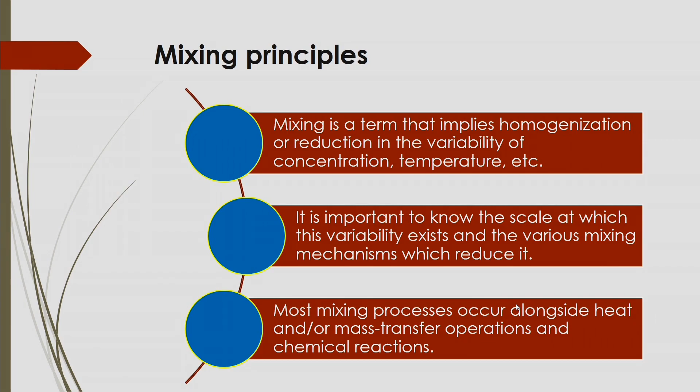So that is why you can say that mixing is one of the important hydrodynamic phenomena in any chemical engineering processes where multi-phase flow systems are taking part. Now, if I say that in any reactor your chemical engineering process is being carried out, in that case you have to use some reactor where the reactions will be carried out.

So, reactor engineering starts with a simple mass balance where your reactions will be carried out. Suppose there is a reaction, so what should be the inlet to the reactor, and is there any generation or consumption of the reactants allowed to pass into the reactor. So the inlet and the generation plus consumption should be balanced by the outlet stream amount and the accumulation, if there is any in the process.

So, here the amount of inlet stream, and generation plus consumption: is any product generated or are any reactants consumed. In that case you have to take into account those terms, and also measure the amount of stream coming out, and also whether there is any accumulation.

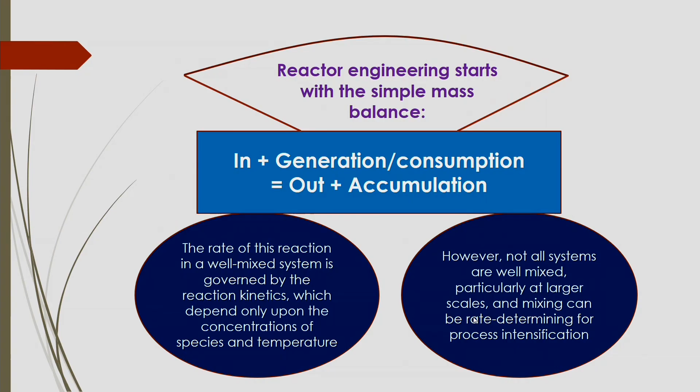If there is three-dimensional mixing, at least in two dimensions you can reduce the back mixing. So you have to design the system in such a way that the mixing phenomena is optimized. And also in fluidization operations, gas-solid reactions are there where adsorption is going on at the solid surface.

So if you design the system in such a way that there will be back mixing of the solid particles, there may be less mass transfer performance from the gaseous stream to the solid stream, because the adsorbent solid particles get back to the original position or circulate, so that due to pressure differences desorption as well as adsorption may happen simultaneously. So there may be hindering of the mass transfer performance.

Another important task for the designer is the prediction of the degree of mixing and the residence time of the species in the vessel. Certain reactions depend on the residence time of the reactants, so you have to design the system such that for a certain degree of mixing, you can predict or estimate the residence time of the reactants.

By generating some models you can predict that degree of mixing and the residence time. There are several methods to estimate the degree of mixing, like the tracer technique method, and some other techniques are also available. The tracer technique is one of the important techniques by which you can predict the degree of mixing.

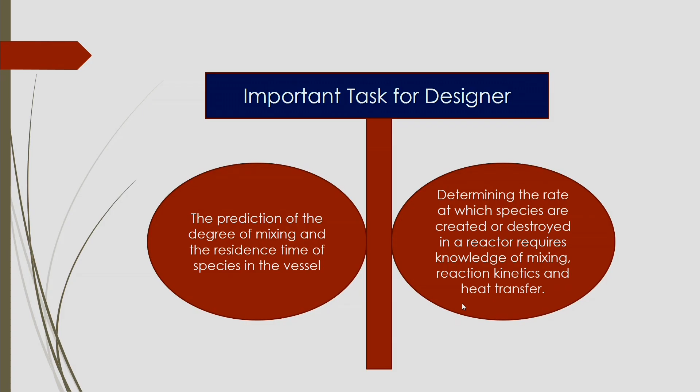If you have more mixing, you will automatically get a different value of activation energy and the rate constant of the reaction. These are the important criteria for the designer to develop systems based on these mixing characteristics for process intensification.

Designers nowadays are procuring different devices based on these mixing characteristics, trying to reduce the size of the reactor. Reduction in scale is one of the important aspects for process intensification.

What happens when the scale is reduced for process intensification? The reduction in scale implied by intensification has many desirable consequences for chemical engineering operations, like lower mass and heat transfer resistance enabled by the reduced path lengths of the diffusion or conduction interfaces.

If you make a system such as a micro channel based reactor, you will see that path lengths may be very small for the diffusion or conduction through the interfaces.

So, in that case you can get lower mass and heat transfer resistances, so the performance of the mass transfer operation and heat transfer operation will be enhanced. Also important is coupling with more intense fluid dynamics in active enhancement equipment, where based on this mixing phenomena you can intensify the equipment.

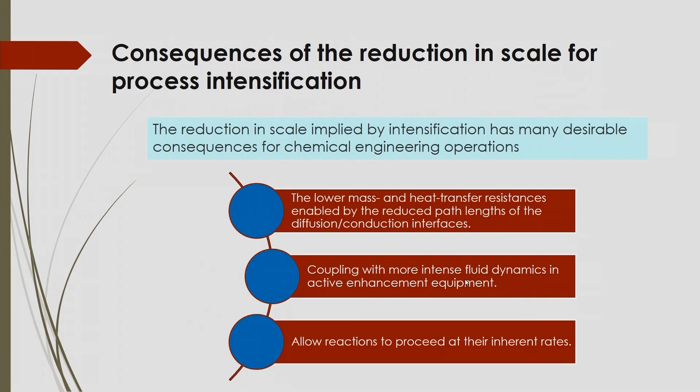Also sometimes you reduce the scale of the system in such a way that when getting contact of the gas-liquid system in, suppose, micro channel systems, gas and liquid flows are there. So you can get more contact, more thin films between the gas and liquid.

You get reactions at the interface, and more reactive mass transfer happening in that chemical engineering process. This can be produced just by the inherent properties to get a more reactive system or mass transfer system by reducing the scale of the unit.

Also, sometimes a more rapid mixing environment can be suggested for process intensification. In that case, producing the rapid mixing environment can be afforded by low reaction volumes, which should enable conservation as well as conversion and selectivity to a maximized process unit.

Also, residence time distribution may be substituted for the hour-scale processing times associated with large conventional batch operations, which will be beneficial, with consequences for energy consumption and process safety.

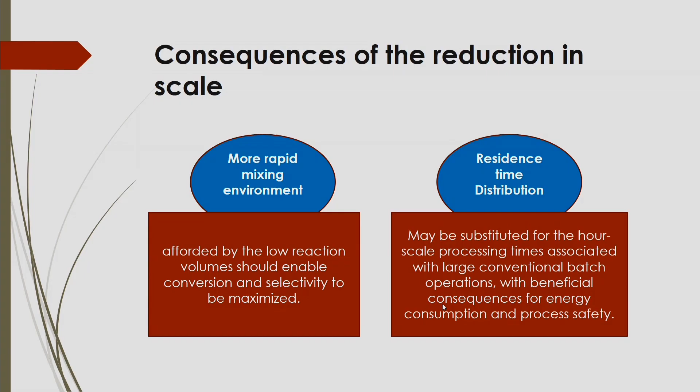Now, the main question is why to learn about this mixing phenomena. Basically, understanding of mixing is desired for the purpose of optimized operation and design of industrial scale reactors. Also, in many cases there are simultaneously competitive several reactions that occur.

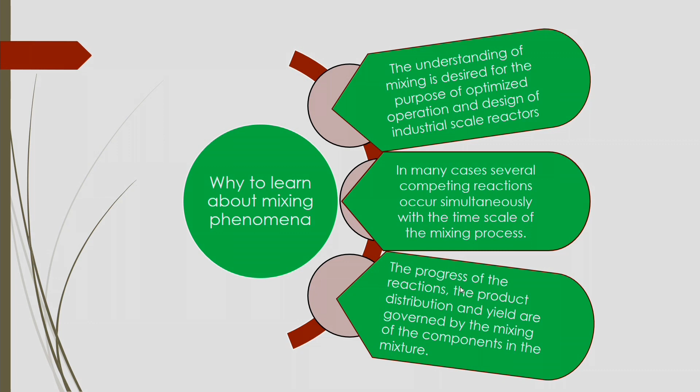In that case, simultaneously, the time scale of the mixing process as well as the degree of mixing are very important factors giving you competitive reaction phenomena and an optimized system to develop that particular reaction. The progress of the reactions, the product distribution and yield are governed by the mixing of the components in the mixture, which is why knowledge of mixing is important.

So how these reactions progress and how products are distributed, and yield governed by the mixing of components in the mixture, that is required to know based on this mixing phenomena. Also, you can control the degree of reactions, extent of reactions, or extent of mass transfer or heat transfer by controlling the rate of mixing. In that case, it is possible to intensify the process to get a better yield.

Generally, mixing time is one of the most important hydrodynamic parameters in different types of chemical engineering reactors for their design and the scale-up of the unit and process.

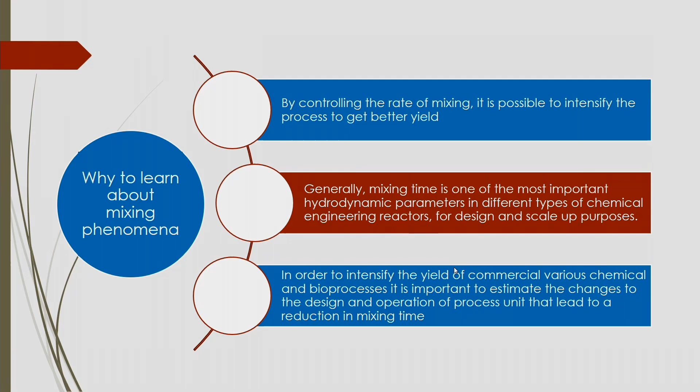To intensify the yield of commercial chemical and bioprocesses, it is important to calculate or estimate the changes to design and operation of the process unit that lead to a reduction in mixing time. You have to design the operating unit in such a way that your yield of the reactions should be optimized based on this reduction in mixing time.

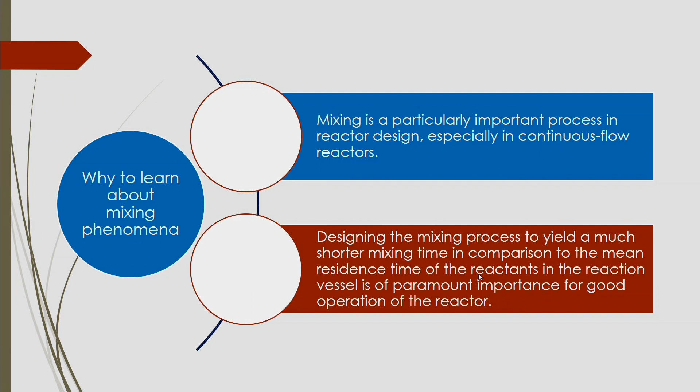Mixing is a particularly important process in reactor design, especially in continuous flow reactors, and designing the mixing process to yield a much shorter mixing time compared to the mean residence time of the reactants in the reaction vessel is of paramount importance for good operation of the reactor. We have to know the mixing phenomena for the design of the reactor, where reaction kinetics, reactive mass transfer and heat transfer can be optimized.

Now, what are the factors actually affecting the mixing time? Generally there are several variables that affect the mixing time or degree of mixing. We can categorize these variables into four types.

The first one is dynamic variables. In that case, flow rate is called the dynamic variable. If you increase the flow rate, you can get more mixing, and in that case there may be back mixing or internal circulation of the fluid, so that you get more residence time of the fluid particles. So dynamic variables like flow rate are one of the important factors.

Then there are geometric variables, like the size of the reactor you are using, and if you are using catalyst particles for a particular reaction, what should be the size of those catalyst particles. If you reduce the size of the particles, you can get more interfacial area, and then more mass transfer.

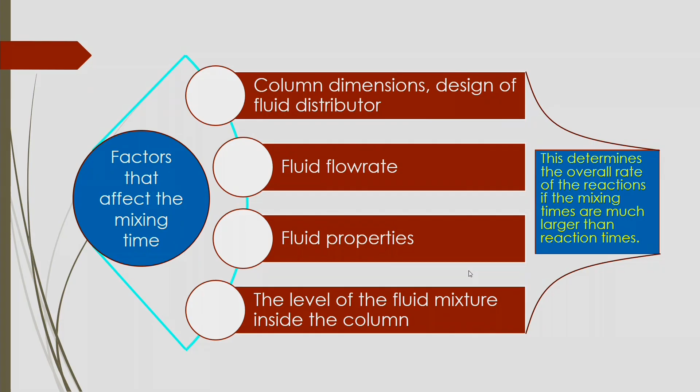Now this determines the overall rate of the reactions. If the mixing times and the degree of mixing are much larger than the reaction times, the overall rate of reactions will be based on these factors that are affecting the mixing time as well as the degree of mixing.

Now, let us consider some phenomena for the slow reactions and the fast reactions. For a very slow chemical reaction, that is relative to the time scale for mixing of the reactants, the extent of reaction is determined by the reaction kinetics and the stoichiometric proportions of the reactants.

And when the reaction is relatively fast, in that case mixing rate, physical factors like sparging design, column diameter, rate of stirring, solvent viscosity, those different dynamic, geometric, physical property variables, and also some other variables are there. Sometimes thermodynamic variables are also important, pressure and temperature. So those factors will be considered for these fast reactions to optimize this reaction.

And the intense mass transfer and micro mixing capability of the rotating packed bed provides the environment to reduce the reaction time 4 to 10-fold compared to the stirred tank reactors. That is why for process intensification, micro mixing or micro reactors are being developed, because it gives higher mass transfer.

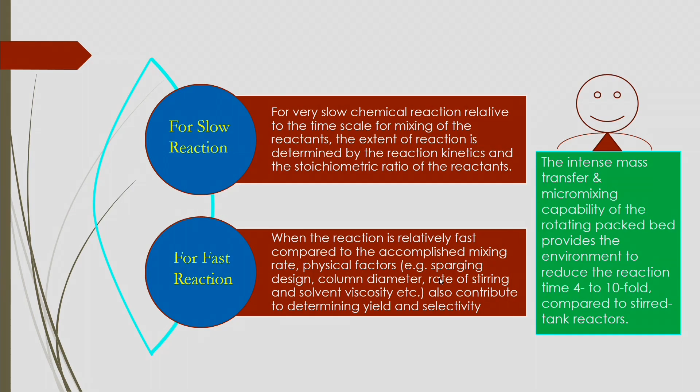Of course, every reactor has some pros and cons. Sometimes stirred tank reactors will be easier to operate, whereas a rotating packed bed may not be easier to operate, and also the investment cost will be higher compared to the stirred tank reactors.

Now you have to remember that in order to exert full control over the progress of a chemical reaction or physical transformation, the fluid dynamic environment must be sufficiently intense so that the mixing and heat transfer rates are faster than the intrinsic chemical kinetics. So you have to remember this, the control over the reacting system based on the mixing phenomena.

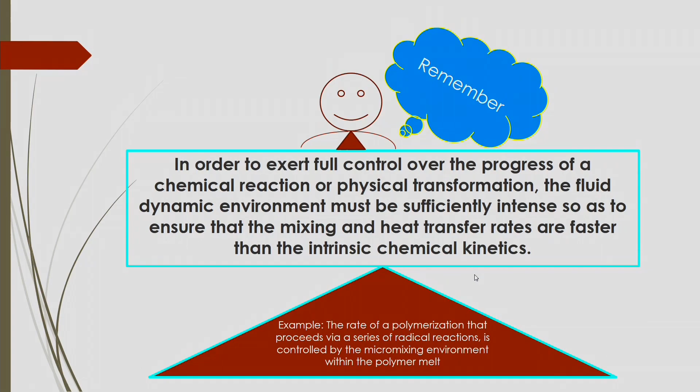For example, the rate of polymerization that happens via a series of radical reactions can be controlled by the micro mixing environment within the polymer melt. So this is one of the important examples where you can control this polymerization reaction based on this micro mixing environment.

Now the influence of mixing and the reaction rates on the reactor behavior, how slow mixing affects the progress of reaction, is represented in this simple diagram. There is a reaction A plus B which gives C, with the reactants A and B traveling in plug flow along a tubular reactor. In this slow mixing, interdiffusion will happen between A and B, which is very slow compared to the reaction rate. Then C is produced near the original plane of A and B separation.

So for the slow mixing, the progress of reaction is represented by this A plus B to C reaction, where reactants A and B travel in a plug flow or tubular reactor. So in that case micro channel based reactors for process intensification are important. In this case interdiffusion of A and B is very slow compared to the reaction rate.

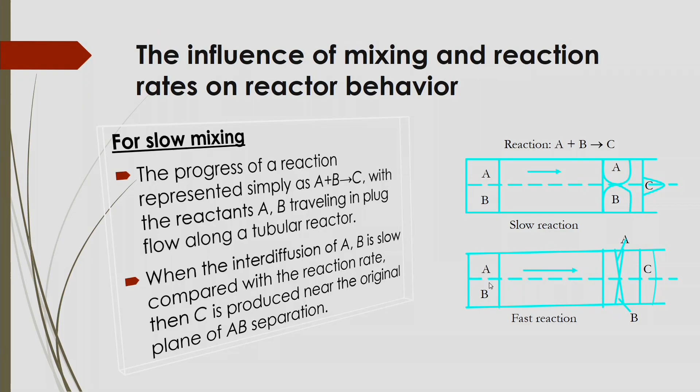And if the mixing is slow, large and varying concentration gradients of the reactant species will exist in the different parts of the reactor. So that is also to be remembered, how you are optimizing the system based on this mixing, whether it is slow or fast. This results in wide variations in the product concentrations and properties that may be deemed off spec in many applications. So you have to remember whether the mixing is slow or fast.

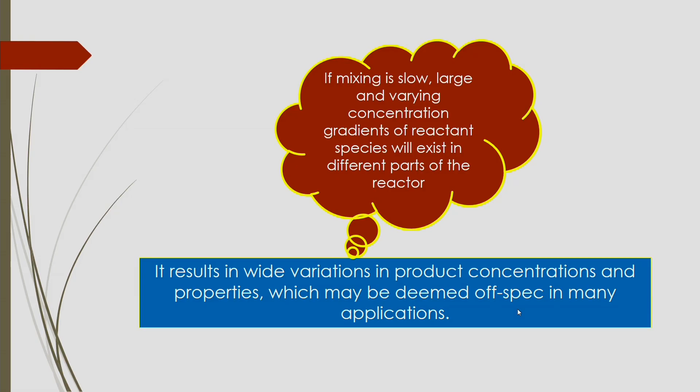According to that, you have to intensify the process and also develop the process unit. And slow mixing represents a total loss of control on two counts. One is that, suppose there is an AB reaction, the AB stoichiometric ratio will vary widely across the reactor diameter. Therefore, the selectivity for the desired product C is likely to be compromised, because a more realistic reaction scheme will usually include many side reactions.

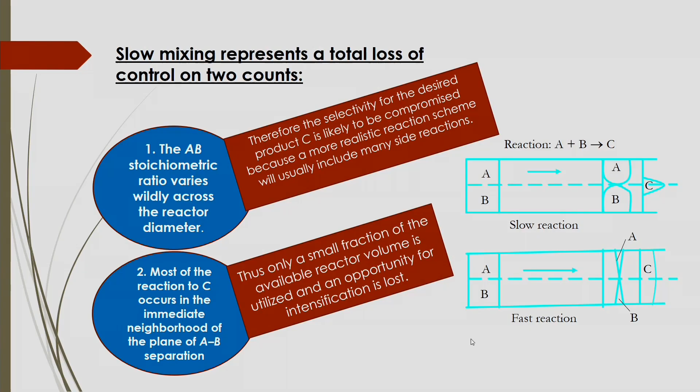And another point is that most of the reaction that gives you C occurs in the immediate neighborhood of the plane of A and B separation, as shown here in the figure. Hence only a small fraction of the available reactor volume will be utilized, and an opportunity for intensification will be lost. So, these are the two counts to be remembered for slow mixing, for the total loss of control.

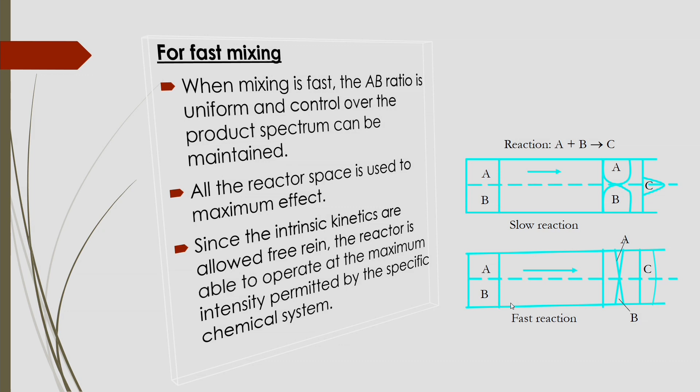For fast mixing, when the mixing is so fast, the AB ratio should be uniform and there should be control over the product spectrum, and the reactor space should be used to maximize this effect, and intrinsic kinetics should be allowed free rein, where the reactor is able to operate at the maximum intensity permitted by the specific chemical system.

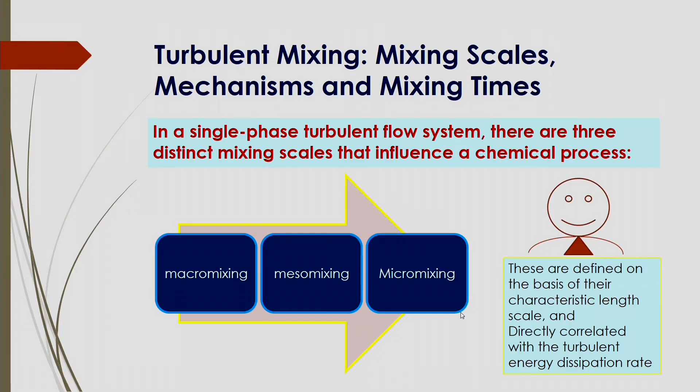Now, if we go to the other mixing mechanisms, like turbulent mixing scales and mixing times. In single phase turbulent flow systems, there are three distinct mixing scales that influence a chemical process: macro mixing, meso mixing and micro mixing. These three mixing scales are generally considered for the intensification of chemical processes. These are defined on the basis of their characteristic length and are directly related to the turbulent energy dissipation rate. So, based on the energy dissipation in turbulent conditions, you can actually optimize the mixing characteristics.

So, that is why sometimes in a reactor some provisions are made to get intense mixing inside the fluid based on turbulent flow. If you are supplying the inlet streams at a high flow rate, and if you are using provisions like baffles inside the reactor and cross baffles, or nowadays helical coil systems, and inside those helical coils some nozzles that will obstruct the flow, then at high flow rate, whenever it goes through these helical systems or baffle systems, there will be intense shear stress inside the reactor.

So, based on that intense shear stress and high energy dissipation inside the reactor, the fluid gets more turbulent, because of which there will be higher energy distribution and dissipation and more mixing inside the reactor. And the path of fluid mixing may also change by giving these provisions of baffles, nozzles or obstructions inside the reactors, so that the mixing times may be higher or lower based on that design.

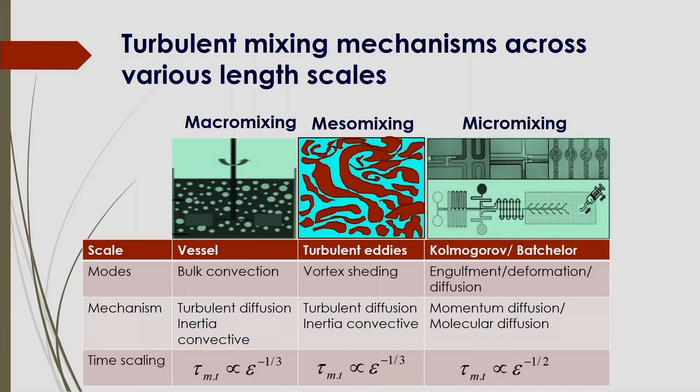If you are considering epsilon as energy dissipation, for macro mixing the time of mixing will be proportional to epsilon to the power minus 1/3, whereas for turbulent eddies it will be the same, proportional to the inverse of the cube root of the energy dissipation, that is tau m,t here. Similarly, for micro mixing, the mixing time is inversely proportional to the square root of the energy dissipation. So based on this time scale, for macro mixing, meso mixing and micro mixing, you can get an idea how the time scale depends on energy dissipation.

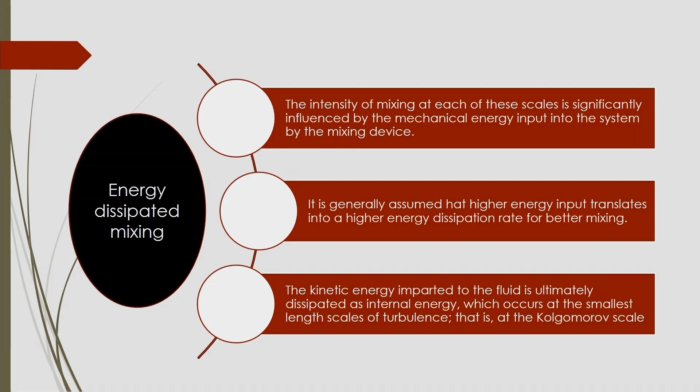Now, energy dissipation and mixing: the intensity of mixing at each of these scales, that is macro, meso or micro, is significantly influenced by the mechanical energy input into the system by the mixing device, and it is generally assumed that higher energy input translates into a higher energy dissipation rate for better mixing. The kinetic energy imparted to the fluid is ultimately dissipated as internal energy, which occurs at the smallest length scales of turbulence, and that gives the time scale represented by the Kolmogorov time scale.

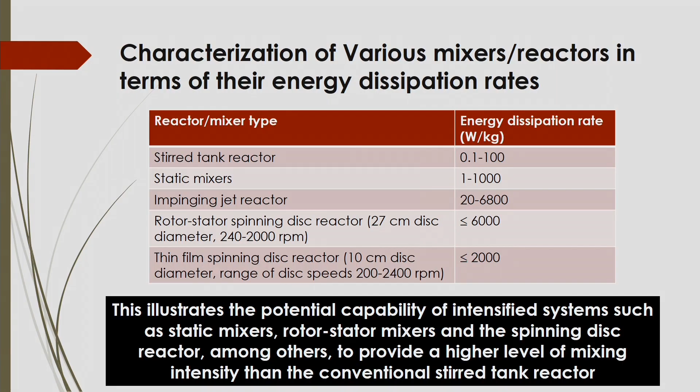So this illustrates the potential capability of intensified systems such as static mixers, rotor stator mixers and the spinning disk reactor, among others, to provide a higher level of mixing intensity than other conventional mixing devices. Macro mixing involves mixing on the macroscopic scale, which refers to the scale of the vessel or reactor. The process is often referred to as distributive mixing, and it is achieved by bulk motion of the fluid elements transported at the macroscopic scale, resulting in uniform spatial distribution of the fluid elements across the reactor volume.

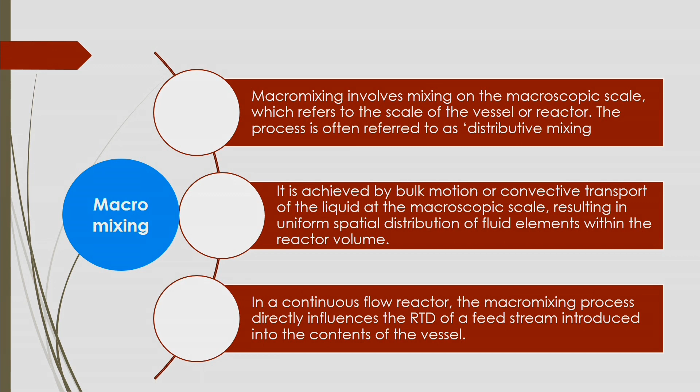And in a continuous flow reactor, the macro mixing process directly influences the residence time distribution of the feed stream introduced into the reactor. And the macro mixing time in a mechanically stirred baffled tank, tau mac, will be a function of the mean circulation time, that is, how much circulation time the fluid element has inside the reactor, and that will affect the macro mixing time.

So that circulation time is actually defined as volume of the reactor divided by the flow rate of the circulation, or the circulation rate. And in a vessel that is configured for optimized mixing, the tau mac should be 3 times that circulation time. In case of a stirred tank reactor, the circulation time is defined by this equation here, V by CD into N D cube.

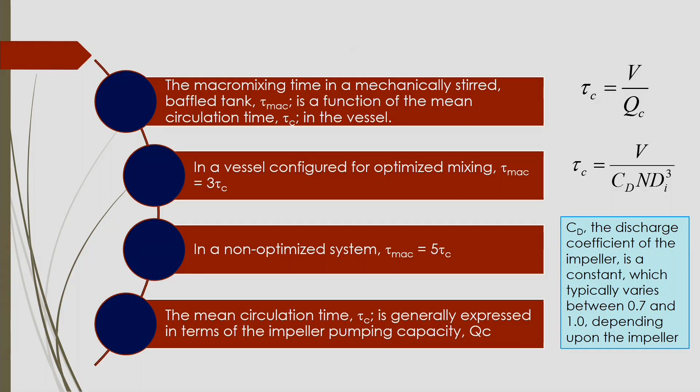CD is the discharge coefficient of the impeller if it is being used for the stirred tank reactor, and it is a constant which typically varies between 0.7 and 1, depending on the impeller design. In non-optimized systems, this macro mixing time should be 5 times the circulation time, and the mean circulation time is generally expressed in terms of the impeller pumping capacity, denoted by QC here.

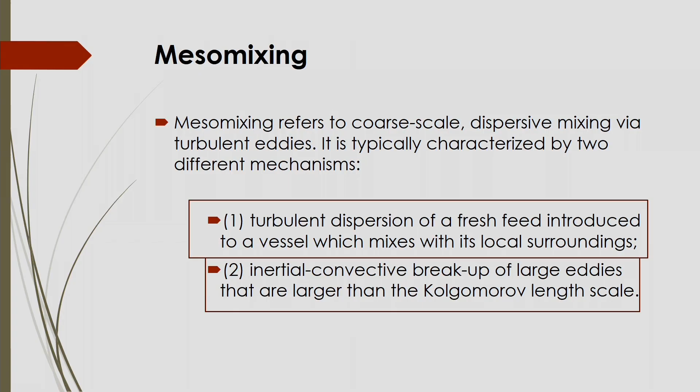Meso mixing refers to coarse scale and dispersive mixing via turbulent eddies; the eddies move arbitrarily and randomly inside the reactor, and it is characterized by 2 different mechanisms. One is turbulent dispersion of the fresh feed introduced to a vessel, which mixes with its local surroundings, and the other is inertial convective breakup of the large eddies.

Sometimes you use different provisions so that eddies are broken up into smaller eddies, and then you get a very small scale of interaction of these 2 eddies, and you can enhance the meso mixing. The characteristic time scale associated with the turbulent dispersion is the meso mixing dispersion time scale. It is represented by tau d, and it can be defined by QF by UD turbulent.

Here if R pipe is much less than LD, where LD is the dispersion length, the characteristic length scale of the dispersion, and R is the pipe radius. D turbulent is the dispersion coefficient of the turbulent medium. So tau D will be R square pipe by D turbulent if the radius of the pipe is almost equal to the characteristic length, or if it is greater than the characteristic length, you can define it by this equation here.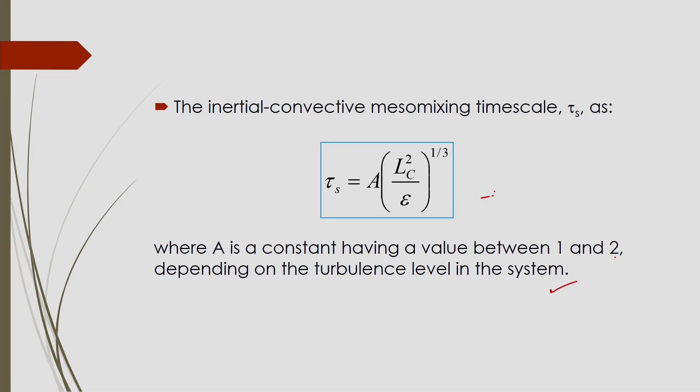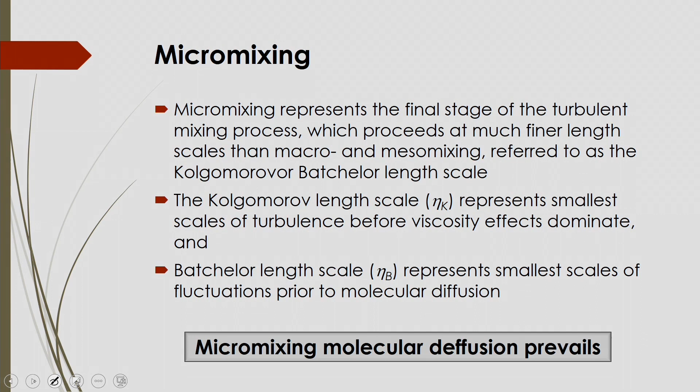Then micro mixing represents the final stage of the turbulent mixing process, which proceeds at smaller length scales than macro or meso mixing, referred to as the Kolmogorov or Batchelor length scale. The Kolmogorov length scale represents the smallest scale of turbulence before viscosity effects dominate, and the Batchelor length scale, denoted by eta B, represents the smallest scale of fluctuations prior to molecular diffusion. So in micro mixing, molecular diffusion prevails.

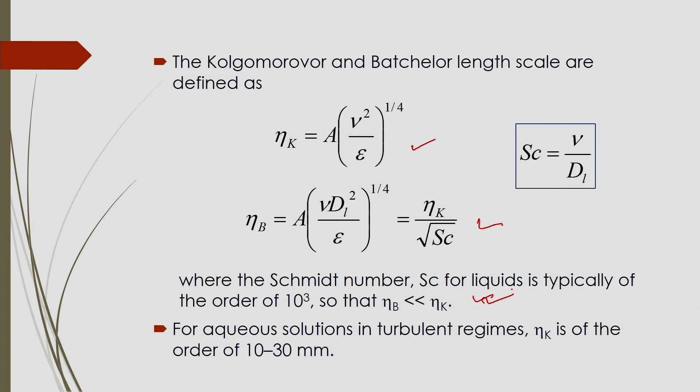This Kolmogorov or Batchelor length scale can be defined by the equations given here, eta k and eta b, where the Schmidt number Sc for liquids is typically of the order of 10 to the power 3. So eta b should be much less than eta k. For aqueous solutions in turbulent regimes, eta k is of the order of 10 to 30 micrometers. So based on this length scale criteria of micro mixing, devices are developed for getting more mass transfer and heat transfer in the systems.

I think I have covered some process intensification phenomena based on these mixing characteristics. This lecture will be helpful for process intensification where you are considering the design of micro reactors or other reactors based on this time scale. For further reading, I am suggesting the textbook to follow, and from the next lecture onward we will discuss more about process intensification based on other characteristics.